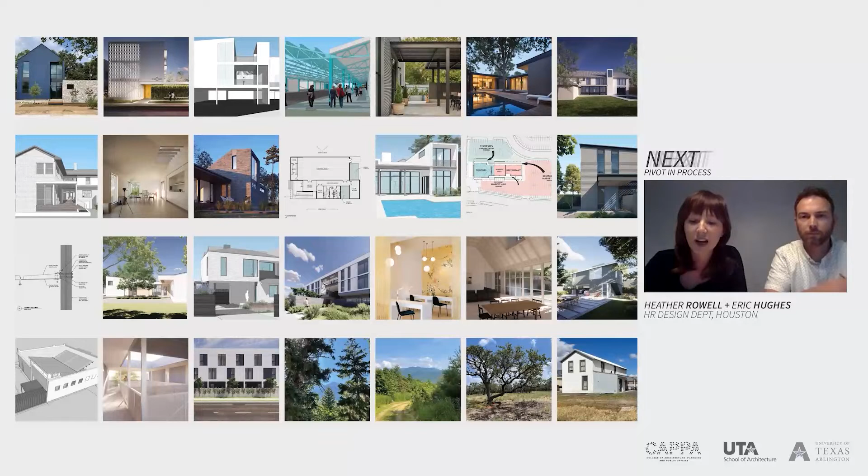This is a little thumbnail of each one in chronological order. They all took really different trajectories, and each one caused us to constantly recalibrate and reassess our design process and the way we communicated with our clients and the people we work with daily. So for this lecture, we decided to pare this down to 5 projects. They're all pretty unique, a couple of them are built, actually 3 of them are built, one's completely, a couple are in process, and one got put on hold indefinitely.

We just wanted to talk about that kind of ebb and flow in the process and how each one is different. So the first project we want to talk about is the Montrose Hotel. The Montrose neighborhood is a really vibrant, energetic neighborhood in the center of Houston, very eclectic, with a lot of culture and energy. We met these clients because Eric and I designed Goodnight Charlie's while we were both at Content Architecture. Goodnight Charlie's is a honky tonk, and we had designed a modern version of a honky tonk for them on the site in Montrose.

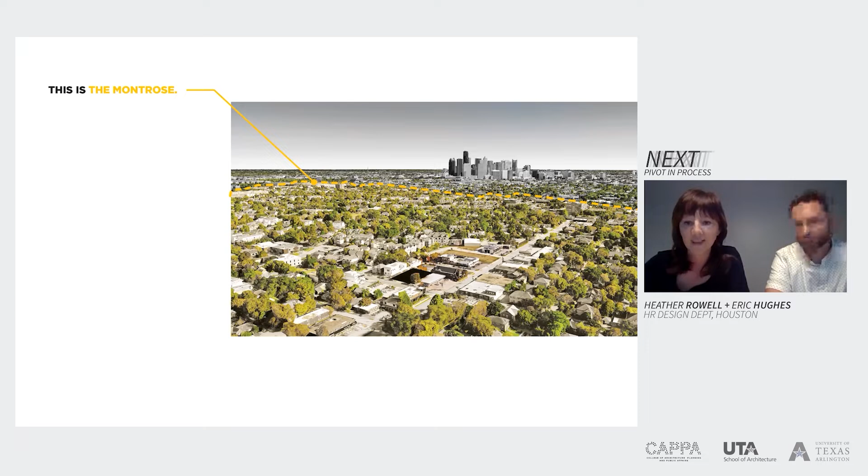This is Montrose, giving you an idea of its proximity to downtown. Goodnight Charlie's is located right here. They approached us and said they would like to build a hotel nearby to Goodnight Charlie's so that they can talk to each other and be an integral part of this area of Montrose.

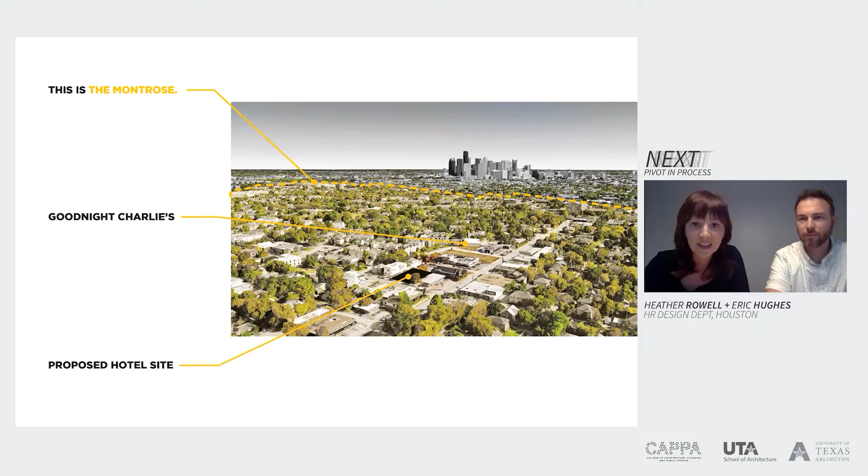But this was on the site. What they initially said is that they wanted to renovate this, a 20-unit apartment complex built in the 70s. It had a pool that had been filled in with dirt, and it was really run down. I took measurements out there and there were cockroaches and bugs everywhere. So it was a pretty daunting thing to think about in terms of how to renovate it to achieve the goals they were imagining.

There were a few things we were really concerned about as we went through the design process with them. One is that we would be changing the use from an apartment complex to a hotel, which meant we'd have to introduce an elevator. We would be required to have additional parking not already on site, so it would probably have to be off-site. It would require additional egress and fire considerations we'd need to take into account. We were also really concerned about the compressed floor assembly of the initial structure; the ceilings were at 8 feet with window units, and reintroducing an HVAC system would have compressed that ceiling even more. As we worked through the design process and came up with ideas, we became more and more concerned we weren't going to achieve the spatial and experiential qualities they were really looking for in a hotel.

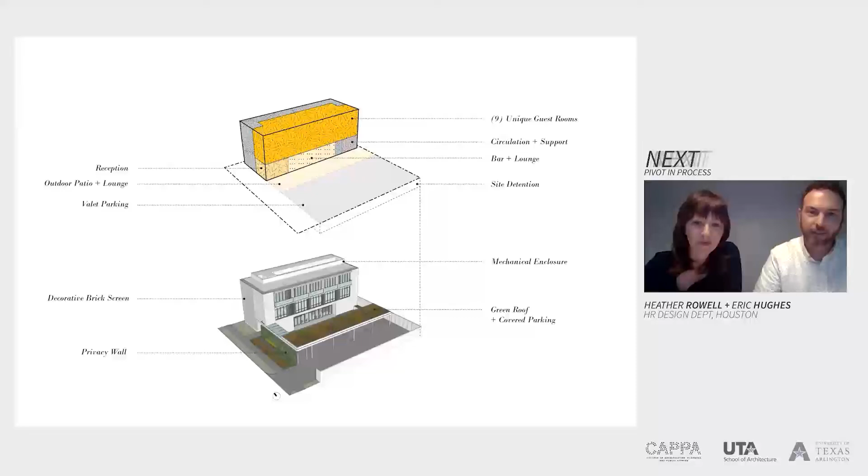The big departure point here was that they decided they wanted to keep all the parking on site. In that case, it meant we had to go with a boutique hotel that has 9 rooms, distributed over the top 2 floors. The ground floor would be a bar, a lounge, and an outdoor patio.

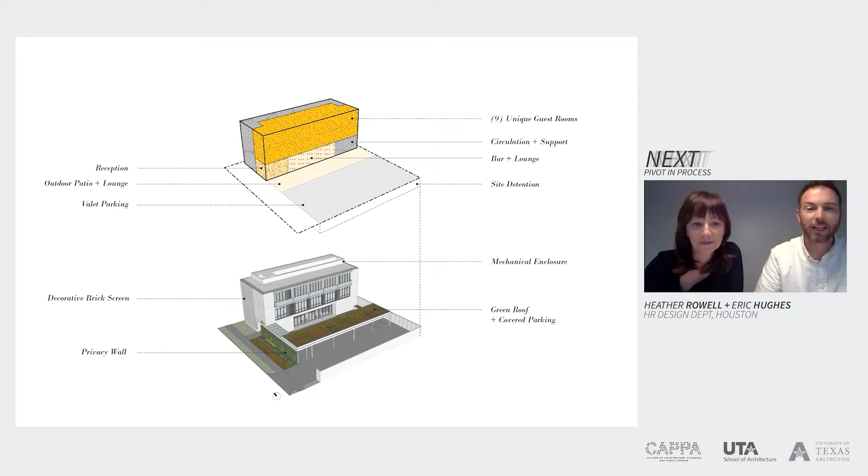On this very small lot, we tried to squeeze in a tiny portion of coveted outdoor space adjacent to the bar and lounge area, while still maintaining some privacy from the street and the parking. So what you see here is the ground floor, the bar and lounge, the lobby near the front, and the direct connection between the bar and lounge and the outdoor patio area, which would have a water feature and is intended to act more like an oasis. You also see the separation between that zone and a masonry wall that divides the parking lot, as well as a wall dividing it from the street.

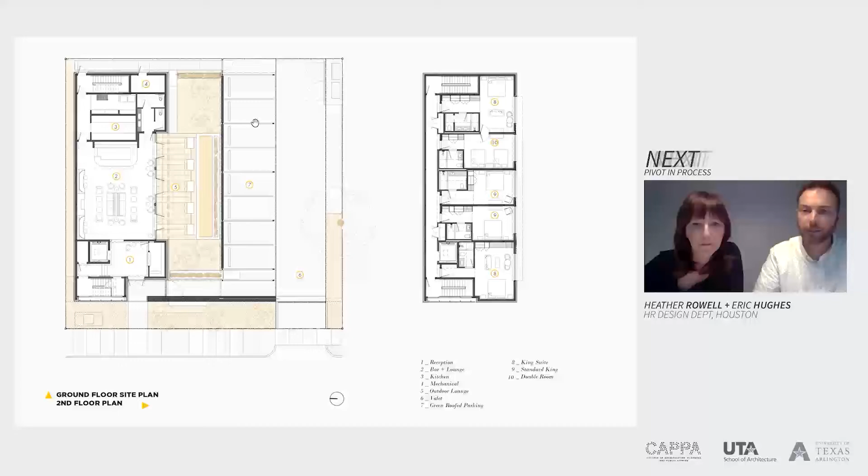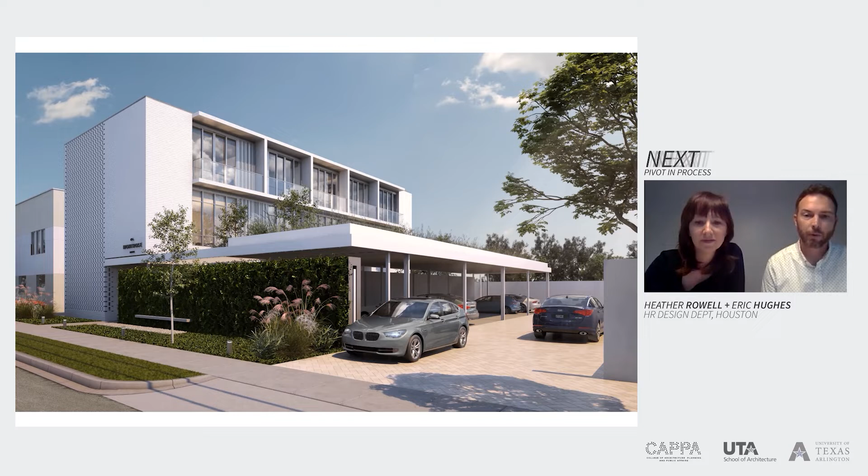This is the rendering of what that would look like on the site. You see the separation of the parking, and in this case we're trying to give a lot of privacy to the units while still maintaining a friendly appearance towards the street. To do that, we tried to implement a lot of texture along that facade, even though it was fairly sparse, through a brick screen that is a focal point at the stairwell, a green wall, and a green roof that covers the parking.

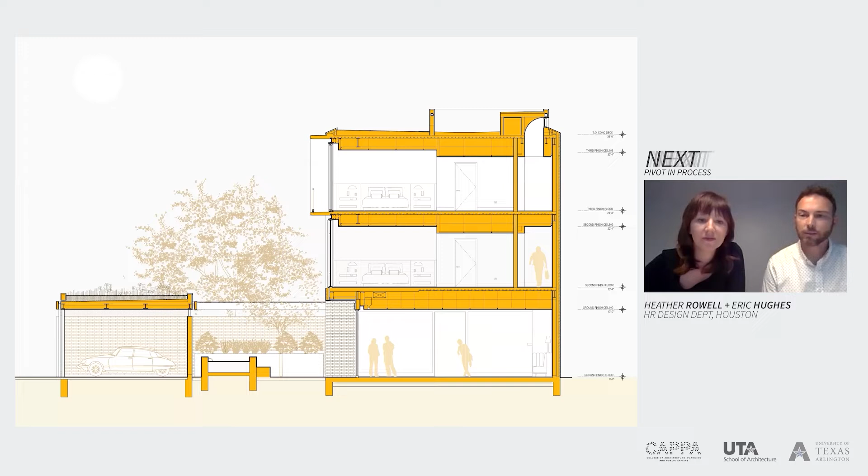This is the sectional condition that you end up seeing, which is really largely about creating these internal views, either into the courtyard or when you're looking over the courtyard, having a green roof to look at above the parking as opposed to just a straightforward parking deck.

This gets back to the idea of the screen and the brick facade, trying to get playful with that from the street. We did a number of studies, experimenting with different ways to develop the masonry. This is the one that was settled on, with the idea that it acts as a lantern and its own signage element at night, brightening up that facade.

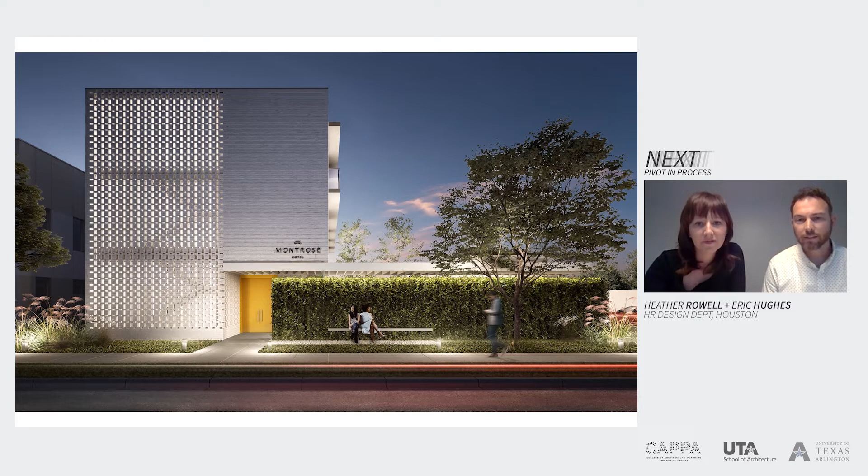Just a quick view of the exterior, again trying to make that an oasis and carve out a little tiny piece of outdoor gathering space on a very tight site.

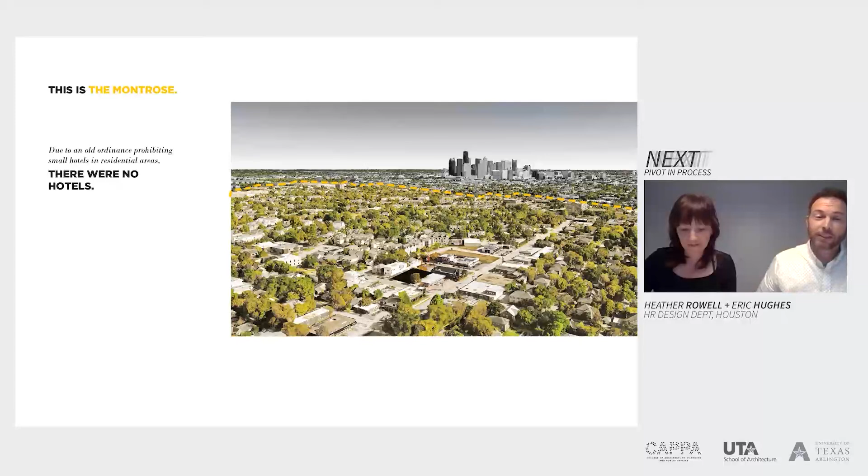But before we could really get anywhere with all of this, there was one big hiccup we had to get past, which is that this is in a residential area where there are no hotels. There's a distinct reason for that: the city of Houston has restrictions on hotels under 75 rooms and requirements for placing those in a residential neighborhood. Even though this wouldn't seem like a residential neighborhood to many, since it's part of a linear corridor of urbanism in a very commercial, walkable district, everything behind that highlighted section is all residential neighborhood. So the city wasn't going to naturally just approve this project.

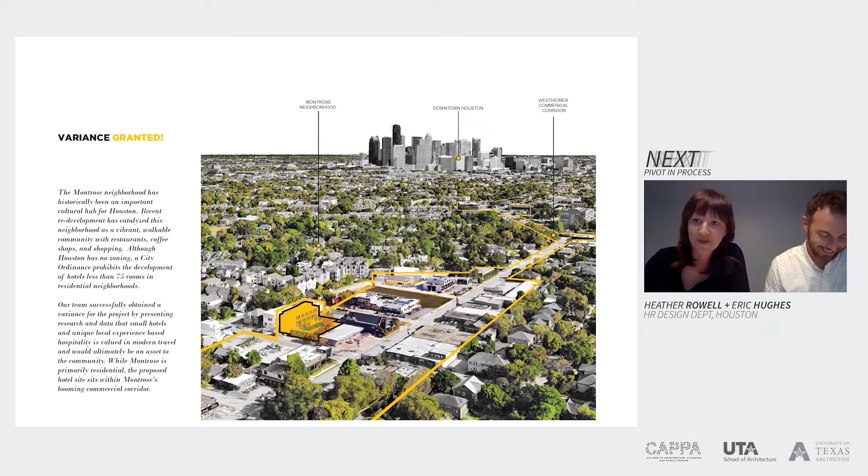What's really interesting is that we pride ourselves in Houston for having no zoning, and we managed, for our first project, to find the one area where there was a zoning restriction that wouldn't allow us to build what we wanted. So we had to go for the variance, but luckily we got it.

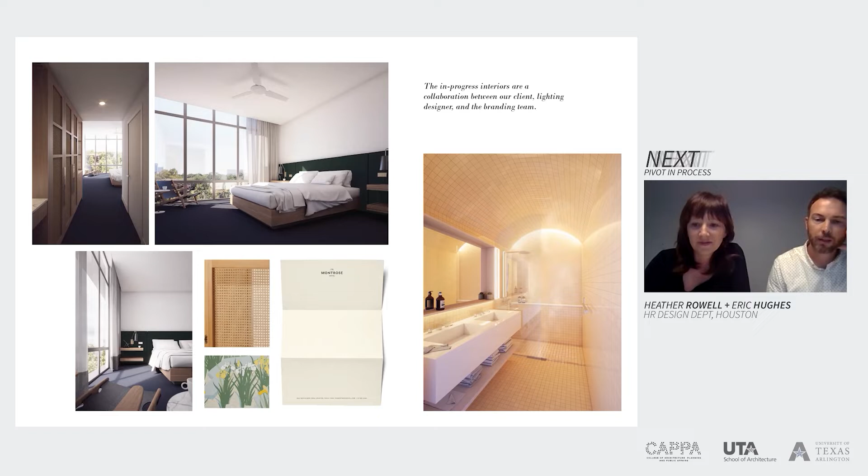The next thing, in developing the rooms, one of the great things is that we got to work with a whole collaborative team. We had interiors we were working with, as well as a branding department and graphic design, and that all went into determining and influencing the look of the interior of these rooms.

Unfortunately, it started out right before the pandemic that the project went on hold, and then the pandemic kind of sealed the fate for an indefinite amount of time. I think there's a chance it might come back.

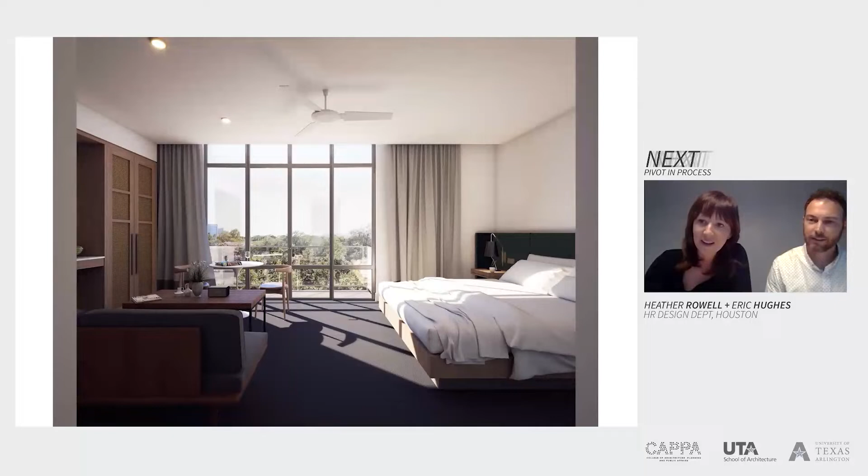If it comes back, it'll probably be in a different iteration. But for now, this one didn't. We got all the way to the point we were about to submit for a permit, and the project got put on hold. So projects have a lot of stories to them, and this is one that we'll see.

And to add to that, it had an established large pecan tree in the middle of the lot. And if you know anything about Austin, they care a lot about the trees, and they're very strict about what you can do on lots that have established trees. So very quickly that became the governing, and in many ways the pivot point, for the structure. And it became the main courtyard that the home wraps around.

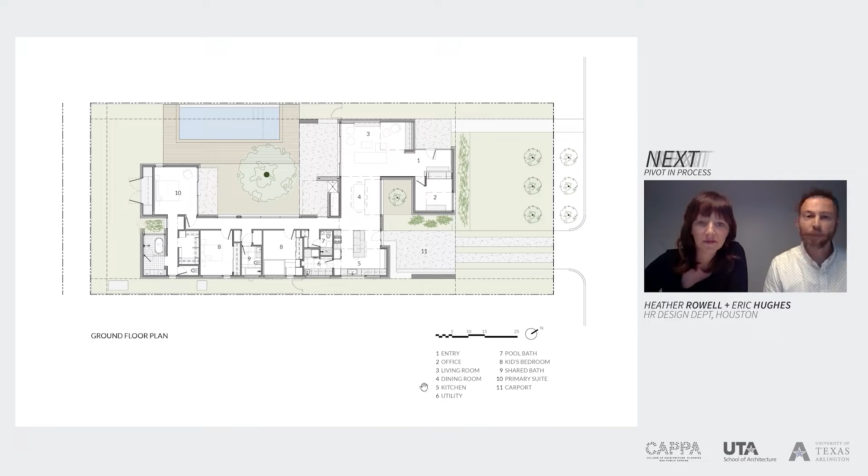But then in addition to that, we created a series of additional courtyards, again trying to get this idea of a house that unfolds as you move through it. So that it's not just about one moment in relation to a courtyard, but it's a series of moments that unfold as you move through.

This is looking through the carport to that first kind of tiny courtyard that's off of the dining room that we'll see in a bit. Entry sequence - you're coming in a more formal entry, you'll see the masonry wrapping through, and then on the right, the idea of these clerestory window conditions that go against it.

The owner was very much drawn to this idea of a mid-century modern language, but we tried to push the usual horizontal datum that you see in those kind of projects.

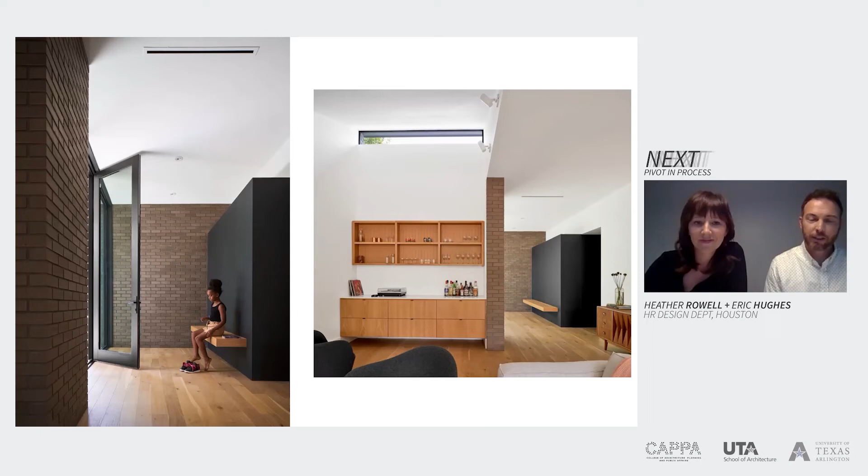And even though it has that from the street and even from the courtyard, there are these moments where there's a lot of verticality and play within the ceiling plane. And that happens here in the study, that happens in the living room where you see it vaulting up to a clerestory condition, that happens again in the dining room.

And what that begins to do is create a series of spaces that are informed by these ceiling conditions. And as you move through the space, even though it feels very horizontal, the sectional condition is very diverse.

Looking down the hallway and again to the main courtyard on the right. And one of the things that we get to be a part of in a lot of these residential projects is helping define the narrative of the home for the clients and getting to design custom components to help define that narrative. In this case, that was a series of bunk beds that relate to the way in which it's going to be used by the kids who will be in that room.

This is the primary bedroom looking back towards the courtyard. And then here, the primary bathroom, and the way in which light is modulated in different ways as you move through the house.

This is really just the most extreme version of that, where all the other little insets and courtyards are bright and airy, and this one is much more subdued and more serene, in relationship to a fairly pivotal skylight moment and a redbud tree that sits below it.

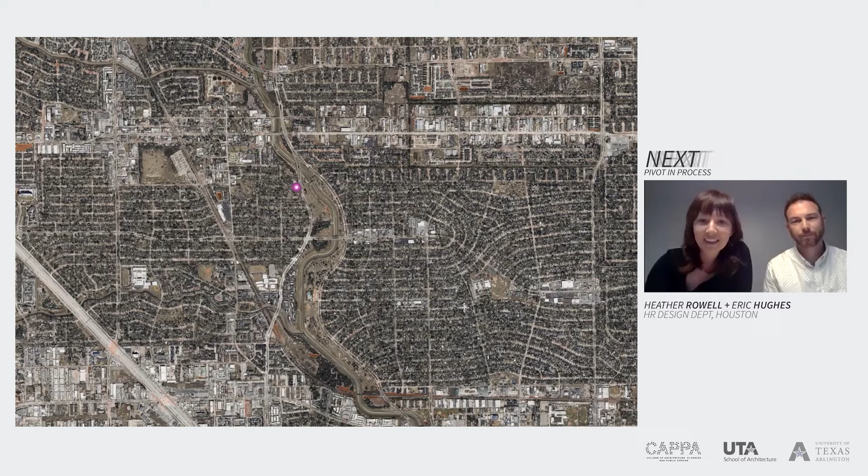It's a house she had lived in a while, and she wanted to add an addition and open up some spaces. We looked at the neighborhood, which is a really cool area on the north side of Houston. This isn't a highway, that's White Oak Bayou running nearby, and there's a big open park space right beside the lot.

Where there's bayous in Houston, there's flooding. This map shows in dark blue the floodway, light blue the 100-year floodplain, and green the 500-year floodplain. Being in the floodplain creates a whole new set of restrictions and guidelines we have to abide by when designing a project.

Renovating in a floodplain becomes really restrictive. If you touch more than 50% of the value of the structure, you have to raise the entire structure above the base flood elevation. If you want to do an addition, you can only attach it through a doorway—you could never open up an entire room onto another room of the addition—and it would need to be at the appropriate elevation per FEMA and local restrictions.

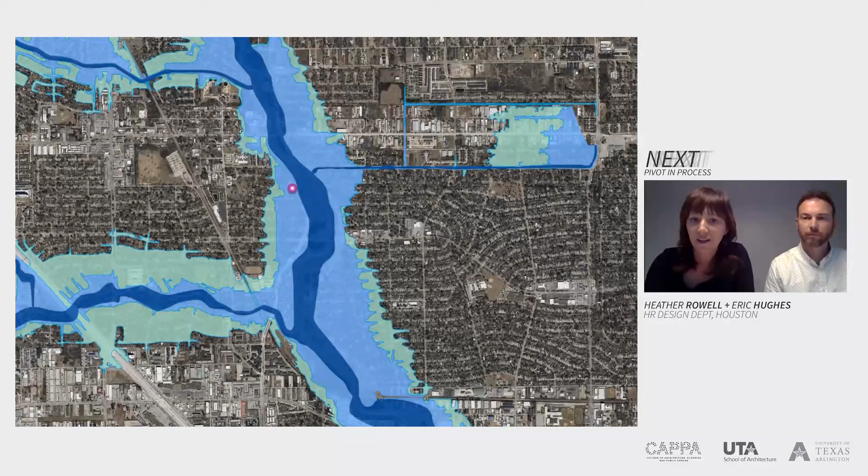We realized she was in no way going to get the house she wanted if we tried to renovate. So it meant we were going to demolish the house and start new, because she liked the location of the project site. She gave us a few parameters that were really important to her.

Even though there was a major street running as a spine to the east of the project, she wanted it to be private. She also wanted us to employ sustainable strategies, requesting a water cistern and solar as part of the house. Probably her biggest request was that whatever we build maximize her lot, so she could use the landscape more than she had with her previous house.

So we worked out a way to anchor the house to the edge of the site. One nice thing about the site was this grove of trees to the north—there's a mason lodge on the lot to the north, so the likelihood of those trees going anywhere for a while was really low. We oriented the house in that direction, which also meant we opened up the lot at its widest point.

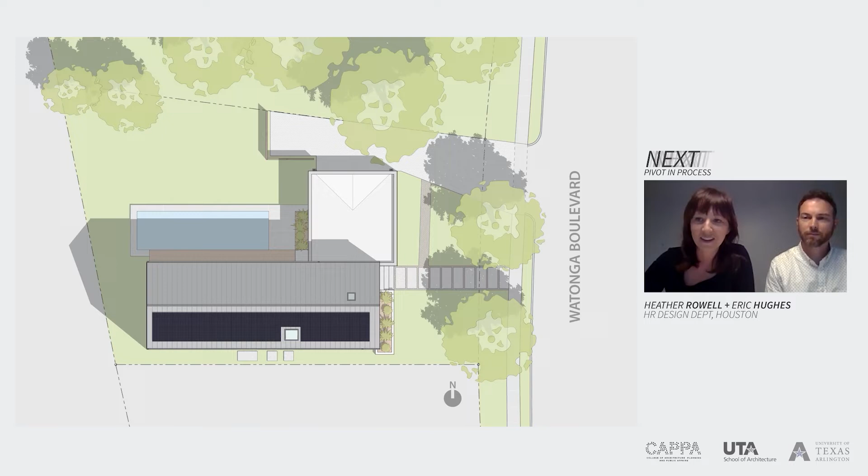She also fosters animals, so a big part of the design challenge was making sure all the surfaces were good for animals to use and share with her, and durable. This is the floor plan of how it started to shake out.

We created two boxes—one is the garage and utility core, and one is the main volume of the house—and connected them with a transparent stitching connector. Even though we were mostly closing the house down to the street, we wanted it to still feel inviting to someone approaching. That stitch creates a spine running through the project, which is all covered outdoor space, connecting the two volumes.

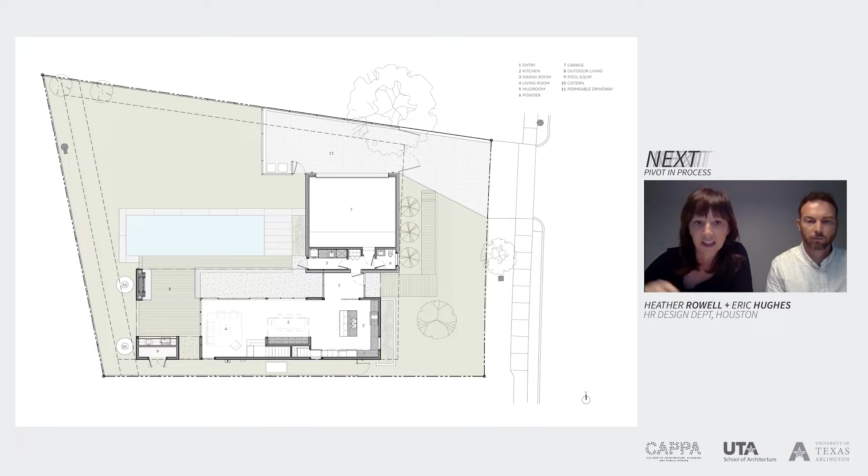On the ground floor, in the center, there's one puncture that goes all the way to the roof, bringing light in from the south side down to the core of the project since all the windows face north. This is an early sectional model, showing the skylight to the south dropping toward the center and punctuating those public spaces.

Another thing we considered is, whenever we have to raise a house high out of that flat pancake landscape, how do we transition back to the landscape in a nice way rather than coming out of the ground abruptly.

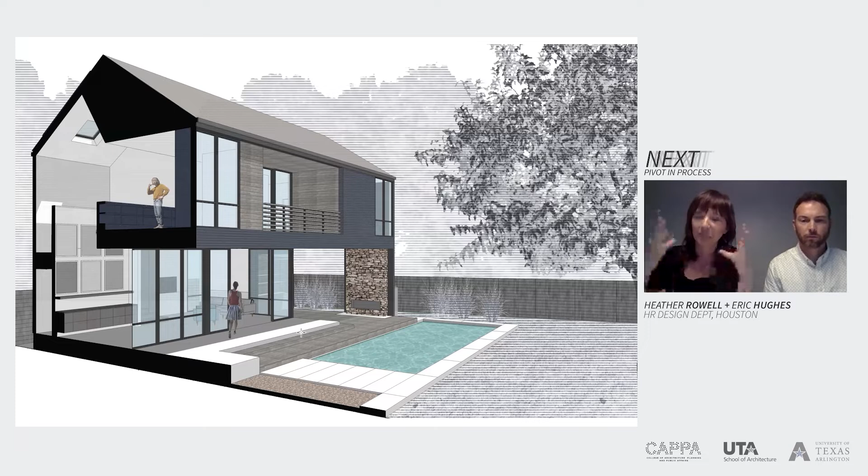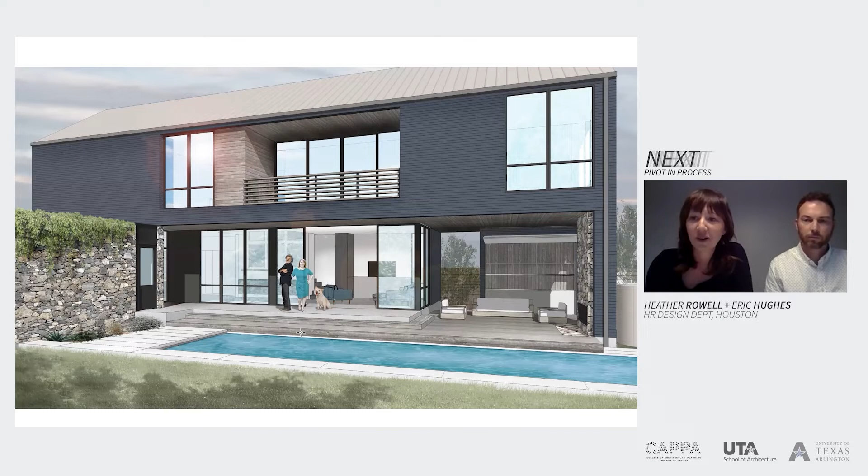One challenge we ran into: when our client applied for the loan, the house appraised lower than comps in the area, and the bank asked us to increase the square footage. We were already in permitting and thought the project was moving forward and golden—then the client came back and said, can we enclose this balcony?

That's literally all the square footage that we needed to get added back to the house for the bank to approve the loan. So we did that, and we turned it into an exercise room on the second floor. Originally, we had planned for there to be an exercise space more centralized, but now it's become a closed area. In the end, it was a situation that we weren't happy about when the request was made, but I think it worked out for the best.

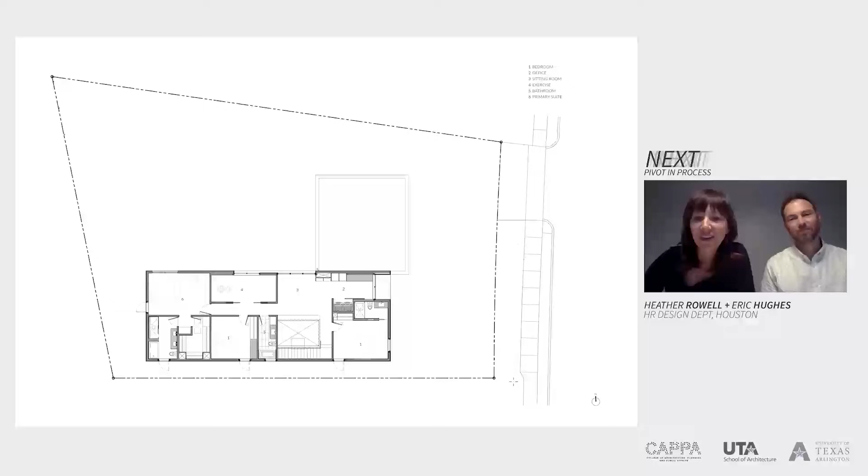So this is how the form took shape once we enclosed that balcony area we had planned for. You can see it's a really simple form: one simple gable that runs the length of a 2-story volume containing all the main spaces, and then a utility core clad in full stone veneer. A very simple material palette is being described.

It's common for us to have projects that don't have huge budgets. So on this project we used a Hardie trim material as a rain screen. It was a little thicker than usual with a thinner profile, and we didn't lap it, which created a look that was unusual for a really affordable material.

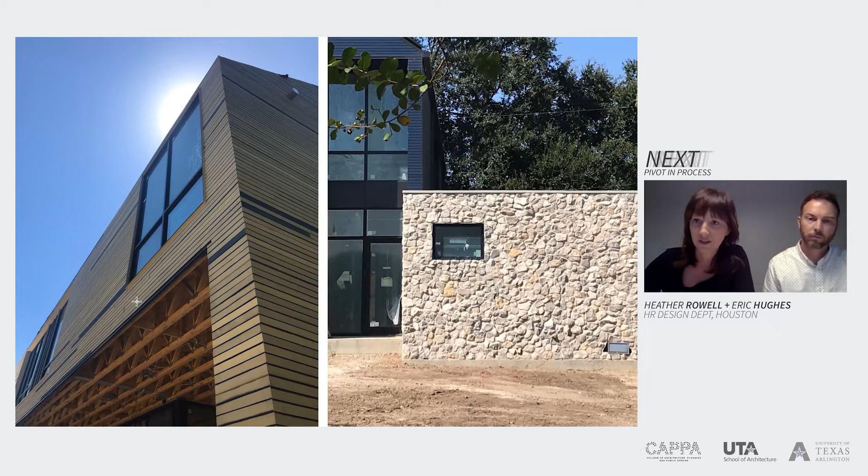This is the front of the house where you start to see that it has that transparent spine running through the middle. You can see straight through the house, but you can't see into the main living spaces. The space above the entry is her office.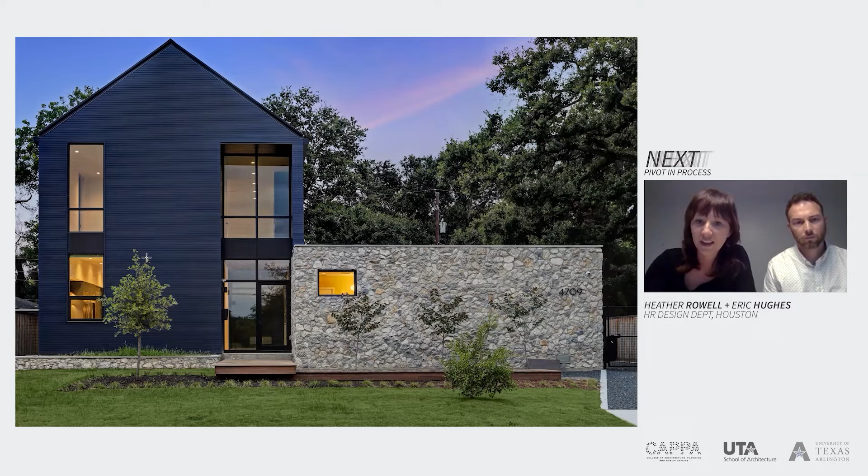And that's that spine again, looking from each direction. This one just finished construction, so we don't have all the photos yet. But here you can see the light well functioning from above, and how the view on that ground floor plane turns to a horizontal capture of the landscape, then that gradual transition back down from the raised plinth.

This is the main ground floor space where the kitchen, dining room, and living are all fully open. Upstairs, this is her office space that has a view framing the park across the street. It also has plenty of built-in shelves for her record collection and a niche for a record player to go.

It was a fun part of the project where we got to design something specific to the client's needs. I think that's a common thread through a lot of our projects - we try to do a few areas that have something custom within them, and we're really careful on how we detail it, but it only happens in a small area that could have a big impact.

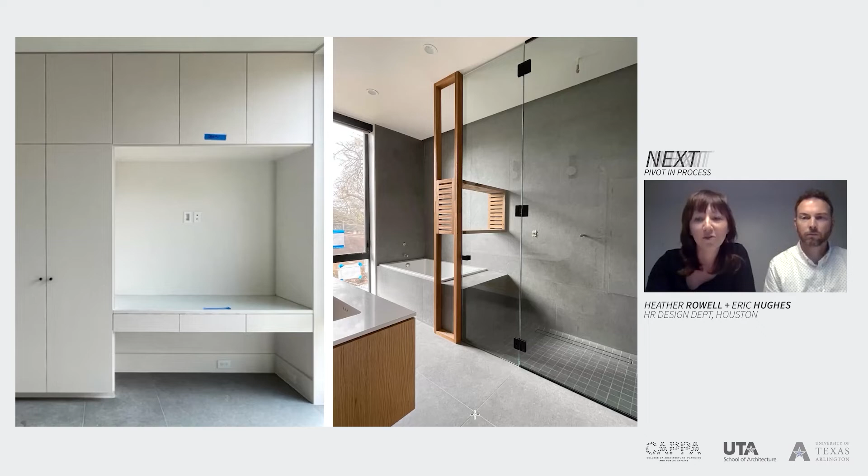So the master bathroom is pretty simple, but we created this teak shelf system that divides the bath from the shower area, creating an element that feels really custom for the level of house this is.

Additionally, we designed a custom stair handrail. We found that that's a pretty easy way to make a big impact within a project. And then we worked a lot with texture, bringing in a lot of different materials into the project - you see that on the right.

And then this is a view looking towards the trees to the north. This is the adjacent lot and the trees that we hope never get cut down.

So this is a project that is a bit of a departure in terms of language from a lot of what you'll see of our work, but it's very much informed by the fact that this is a historic home. It's a home that was built in 1910. A former governor lived there, Ross Sterling. You see it here on the Sanborn maps, the original location.

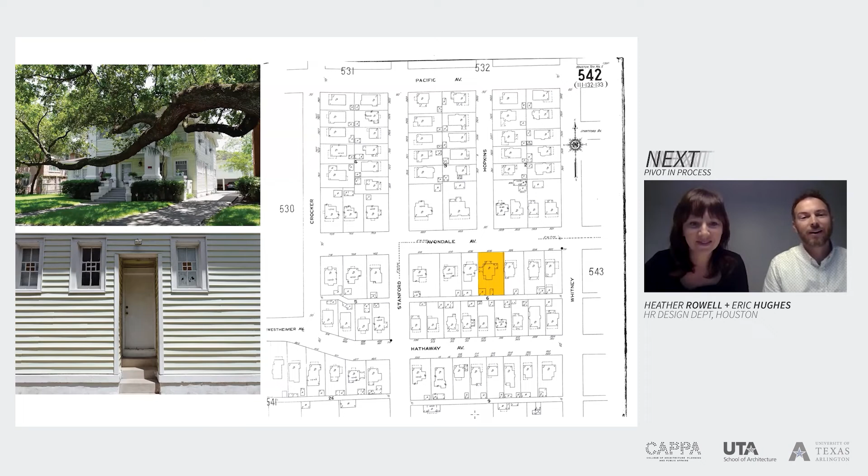The home was subdivided over the years. There were a number of different units - effectively a number of apartments that this had been turned into.

Then the developer, in their quest to make improvements to the small complex, decided they were going to cover the whole thing in vinyl siding and rip out all the original windows to put in vinyl windows. At which point the city said, I don't think so. They red-tagged it with so many red tags that the developer became overwhelmed about how they would get past that. That was in 2016.

So it was abandoned for a few years. The owners of this project used to live in the neighborhood and walk their dog by it, and they would walk by and just say, man, that would be kind of our dream home - we'd love to have that someday.

And because of a series of poor decisions by the developer, that actually became an attainable thing as it sat on the market because no one wanted to deal with it.

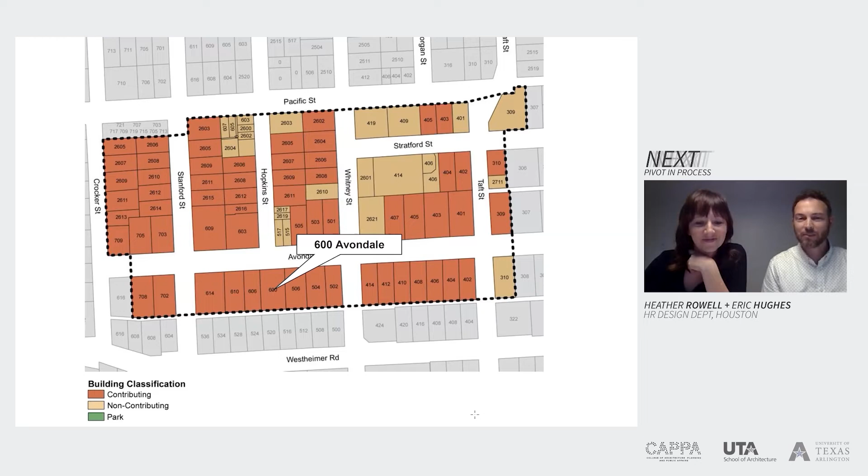This is the historic Avondale district, and you'll see we sit just on the edge of that. Because of that, this is considered a contributing structure, which means we really can't do much to the exterior other than restore it. In this case, we negotiated with the city to restore it to what it should have been, even though a lot of damage had been done that we couldn't do anything about.

So the first step was uncovering a lot, taking off the vinyl siding to see the state of the original 3/4 inch wood siding, which we were able to save and keep.

Also looking at the porch and the fact that it had these large wings on it that weren't part of the original structure and were contributing to the deterioration and demise of the porch. That all got torn off. The whole porch literally had to be rebuilt.

Thankfully, we had owners that were willing to really reduce the square footage of their home, and in this case, they were willing to modernize the back of the home a little bit.

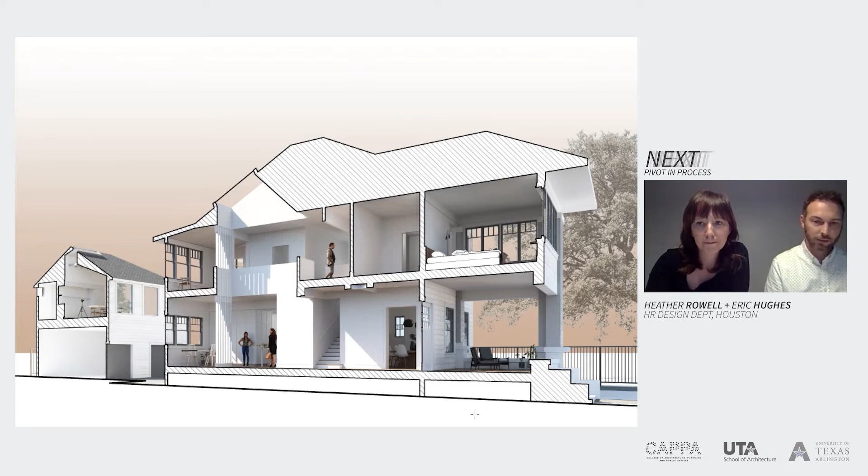In the way these older homes would do, we left the formal spaces at the front of the home, but created this big moment when transitioning between the two. We also relocated the door so that instead of a large formal entry sequence, we gave that space over to the dining room, creating a connection between the dining room and the kitchen in the rear.

And then we also reworked the staircase, which had picked up a large amount of real estate, and straightened it out.

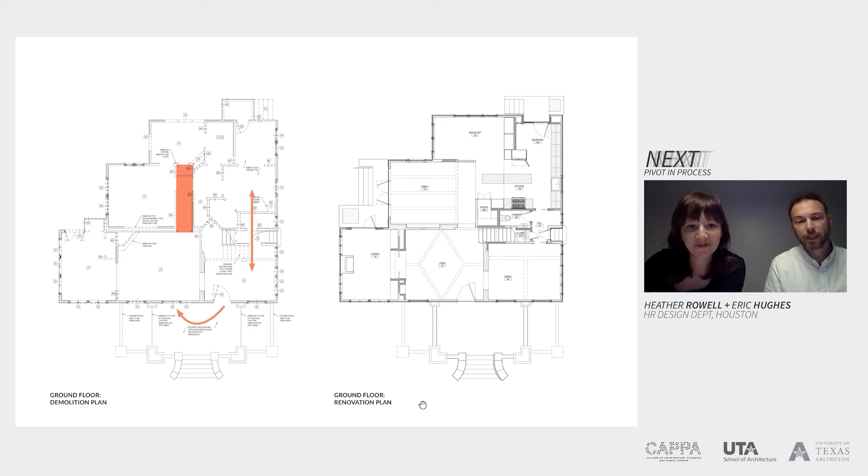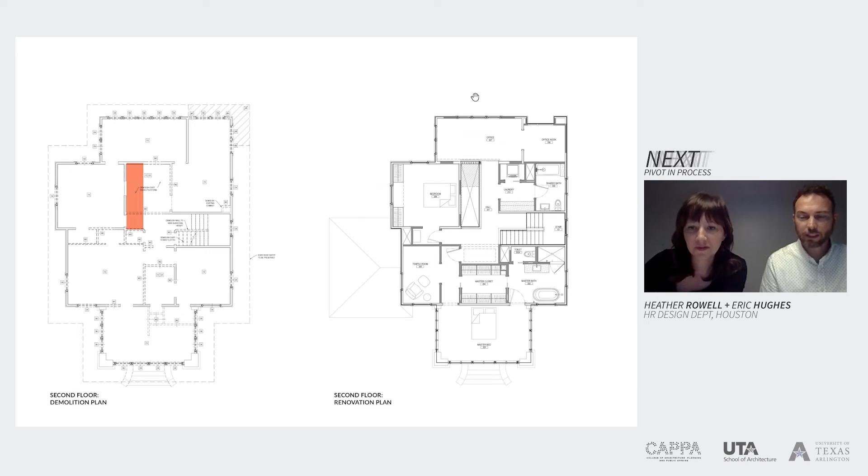The other thing to note is that in these old homes, there were sleeping porches off the front and the back. Moving forward, you'll see the way in which we incorporated those into bedrooms.

This is looking at the main entry. We repurposed the front door, actually rebuilt the front door to match the original, per the historic requirements.

And then when you come in, you're directly on axis with that light well, which you're about to see from the second floor vantage point, the way in which that got carved through.

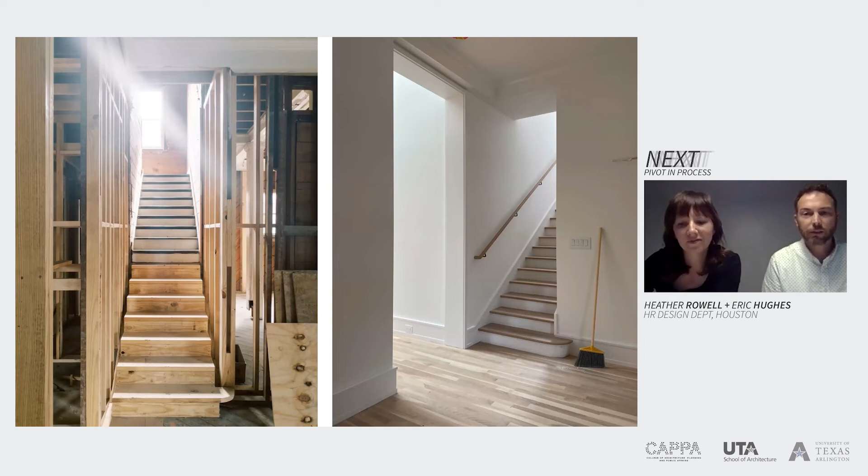We kept a very simple white interior palette, but the owner was really on board with the idea of introducing texture within that white palette. So the vaulted condition becomes a scallop motif, which then carries through to a screen on the first floor, with the straightened out staircase.

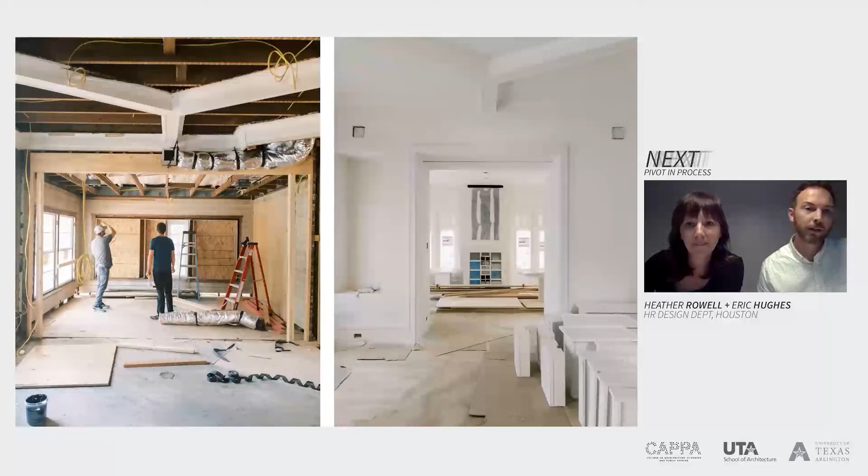We made efforts to maintain the existing trim, there's something nice about the character of that, even the kind of old paint that exists on it.

This is the primary bedroom, which is the old sleeping porch, which you'll see has become the kind of treehouse moment of the home, and has a large oak tree with branches that sprawl and overlook it. This is from the second floor, seeing that kind of scallop texture that we created, introducing some more modern details in relation to a more traditional home.

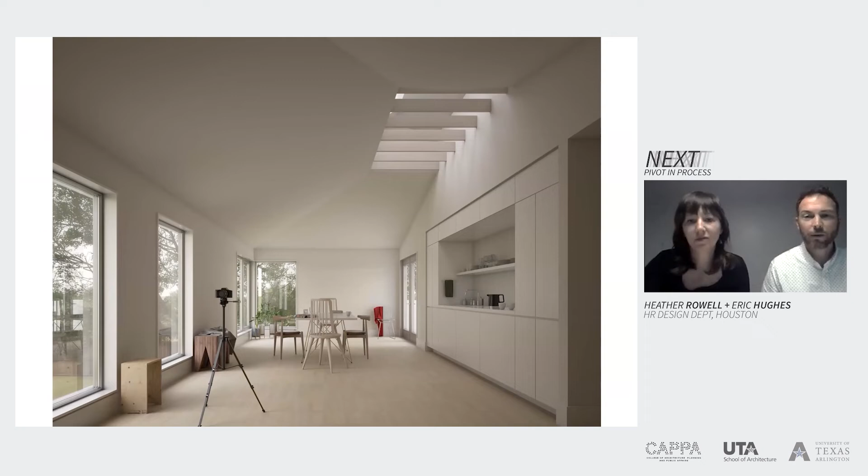Again, with the stairwell. And then in the rear, the garage apartment, which became her photography studio and his kind of machine shop below. It was on a tight budget, and so of course it was all about light as a photography studio. We just made one big move, bulking everything up to a clerestory condition.

Well, this one is almost done. They should be moving in just a few weeks. So stay tuned, we'll be able to share some more photos of that, especially since the client is a photographer.

This project began in the pandemic, and this is the last project that we'll talk about. It's one that caused a big shift in our office and how we were going to communicate with our clients, and how we would navigate the crazy past year and a half that we've all had.

When they no longer could, we asked them to develop digital models that looked like physical models. So all of these, the students did digital models. We even asked them to add things like X-Acto blades and things in there that bring scale, that make it feel like it was actually a physical model. It was a really fun exercise.

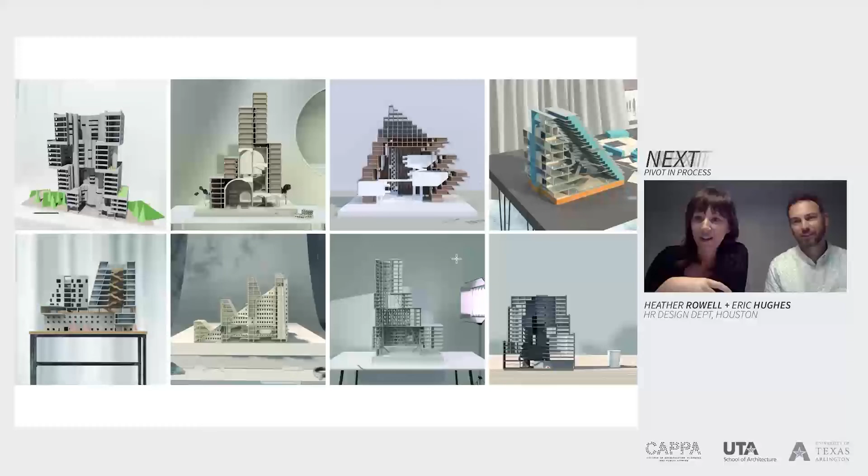Since we were exploring that within the school, we decided to take a similar approach whenever we were going to present the first ideas to the client on this project. We thought we were being so smart. We said this is going to be a great idea: we're going to present three concepts to them, but because it's all going to look like it's made out of basswood, they'll only focus on how it relates to the site, and they'll focus on the form of the project, and we can have a conversation about these basic initial parameters to a project.

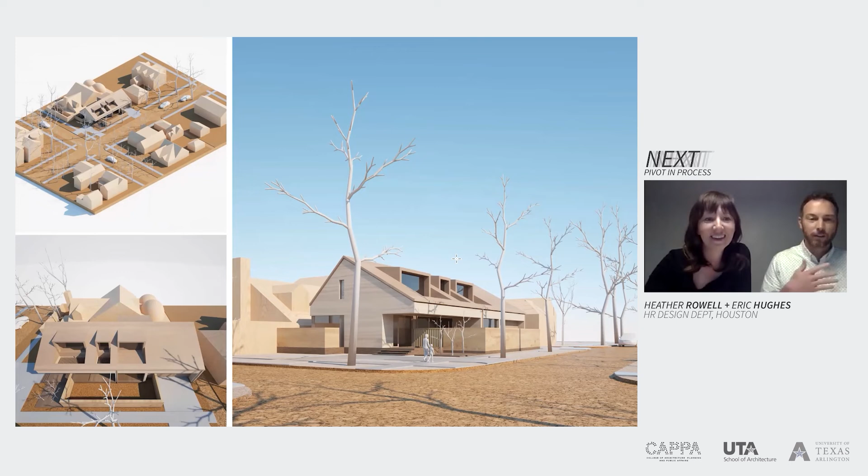Because we constantly have this problem in residential, which is just getting people in that first pass to look past materiality. Sometimes people can get so hung up on one thing, but no, look at the form and look at the space, what the relationship is. So this is the second one we presented, and then this was the third one, which ultimately they ended up choosing. But at the end of our presentation to them, there was a long, silent pause.

And then the first words that we heard were, 'they just all look so brutal.' So we kind of dropped our shoulders a little bit and regrouped and thought, okay, well, that didn't work. But it was a good try.

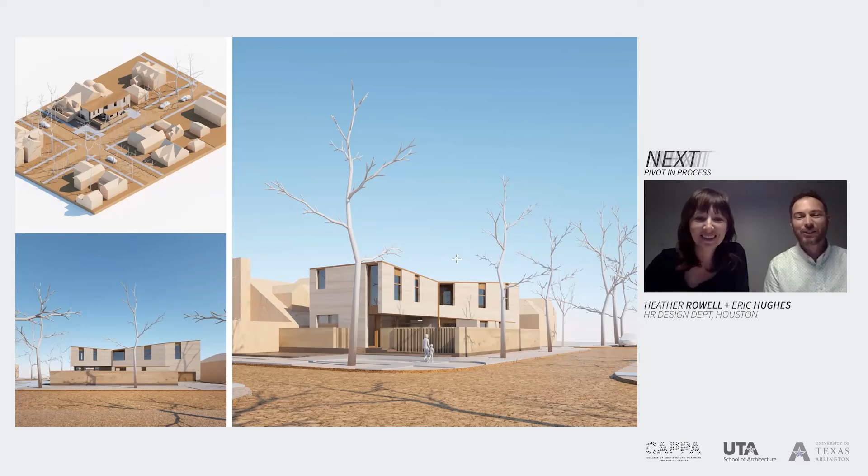So then we went back to more conventional representational means of showing what the actual materiality was. And it was funny how the minute that we did that, it suddenly became very accessible again. Suddenly they were on board with the same ideas, even though they were just being represented in a different way.

So the project kind of took shape as a masonry structure, but then the roof shape was dictated by solar considerations as well as rainwater collection, and then it had an orientation to a side yard on a fairly small urban lot, relatively speaking.

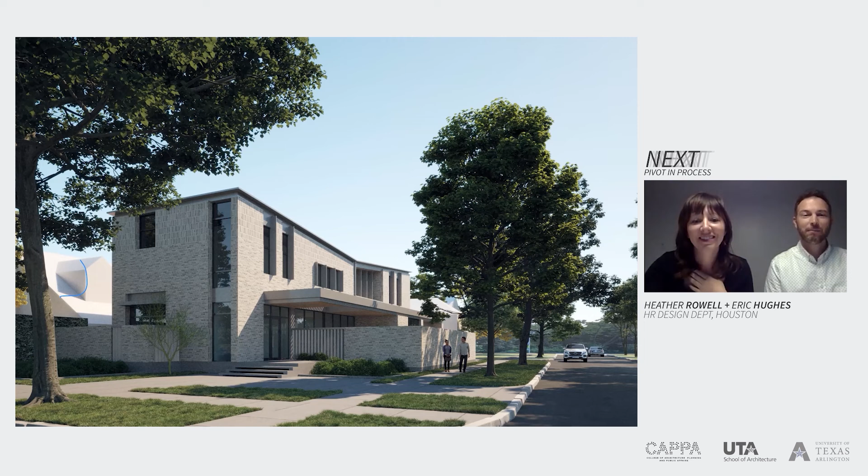And then COVID hit and supply chains changed and material shortages happened, and the budget ended up taking a turn, and we had to rethink the masonry but still introduce ideal texture. We did that through Hardie siding and through using the 3/4 inch thick material, having it be lapped on the bottom and then flush on the top, still maintaining those horizontal datum lines. That made a huge difference in the budget.

Everything from steel to... we're proud to say this one's getting built. This was taken today. So, yeah, stay tuned for more information.

So, yeah, this one's on its way, even though it had major hiccups.

Now that we've kind of shared with you those five projects, what we wanted to talk about at the end is how we talk about the design process. In school, we always talk about it being this linear process. This is the initial way we talk about design process, but I think we all know that it's much messier than that.

A way that sometimes people describe it is more like a spiral, where you have a goal that you're heading towards, but you start out with a lot of options and you're trying to focus the scope and densify the amount of information that you're using to project that idea. So you're working your way around the design process and trying to get to the center.

It is very likely that we will have a goal, a target in mind, and we'll start our schematic design process, but all of a sudden that goal will shift. That point we're shooting for is going to change, and it could change for so many different reasons. It could be that the client has changed their mind about something, or that we're faced with a global pandemic that we hadn't planned for. When that happens, the design process looks much messier and much different from these idyllic ideas we have about process. It happens because we're constantly asked to pivot based on new parameters we receive throughout the design process.

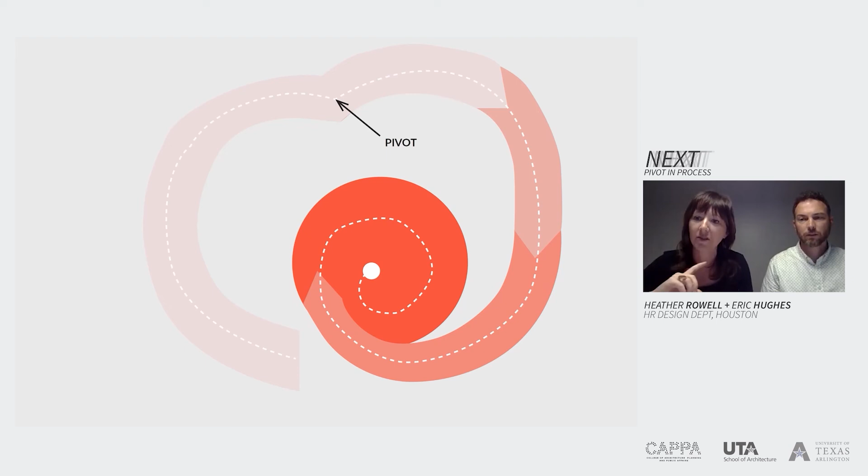Those pivots can occur for so many different reasons. A really common one we're dealing with in Houston a lot is climate change and the fact that we are dealing with flooding. It's changing the way we think about our infrastructure, how we design our buildings, how to make them more resilient. The pandemic completely changed the way we think about our daily patterns of living, how we work, how we want to live in our houses. So those are causing pivots in projects happening right now across the world.

There are also times you have to pivot in a project because there was a supply chain shift, or maybe a market shift. Maybe the value of the land has gone up and the client decides to sell the land rather than build on it. That's definitely happened before too, and it causes a pivot within the process.

Regulatory issues are also things that cause us to have to pivot. It could be something like the city of Houston recently changing the base flood elevation for floodplains. It used to be 1 foot above the 100-year, and now it's 2 feet above the 500-year floodplain. Or it could be an HOA, and a single person in a neighborhood deciding you have to change your exterior material.

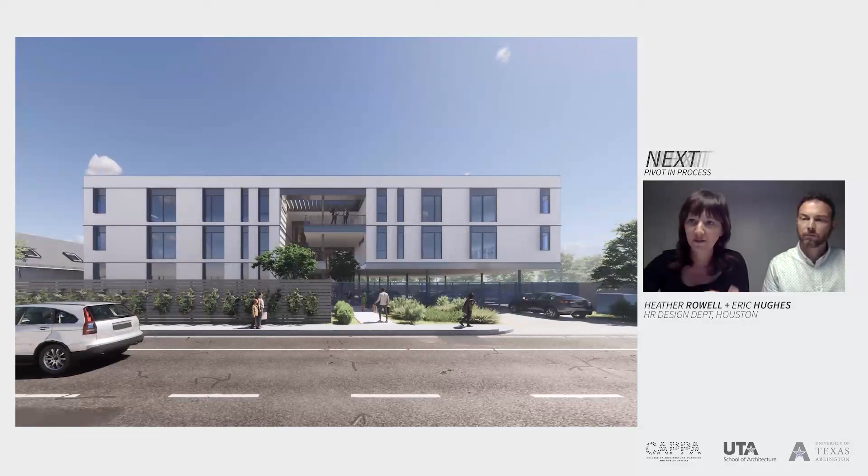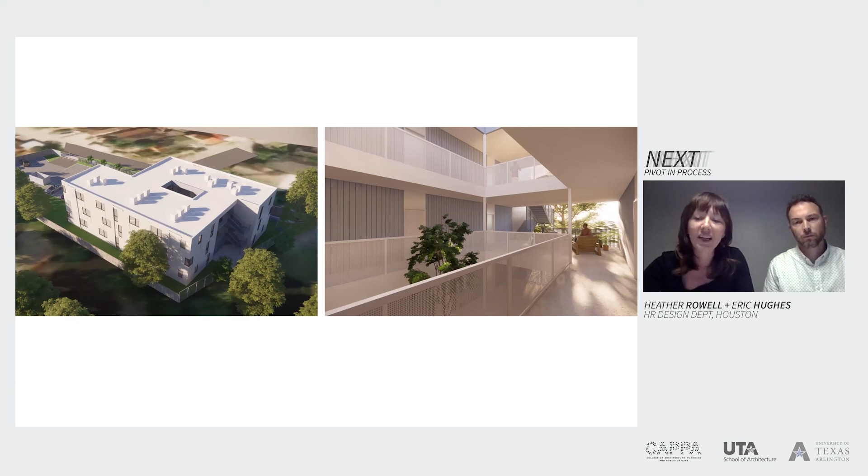These 3 projects are all multifamily projects for the same developer, who tasked us with creating affordable multifamily projects about 20 units each. We've designed them to save on design and construction costs and be more efficient, using the same interior units across the projects. But we're rearranging them based on the site they're placed on, and coming up with new exterior strategies, all using the same material palette so each one takes on its own persona.

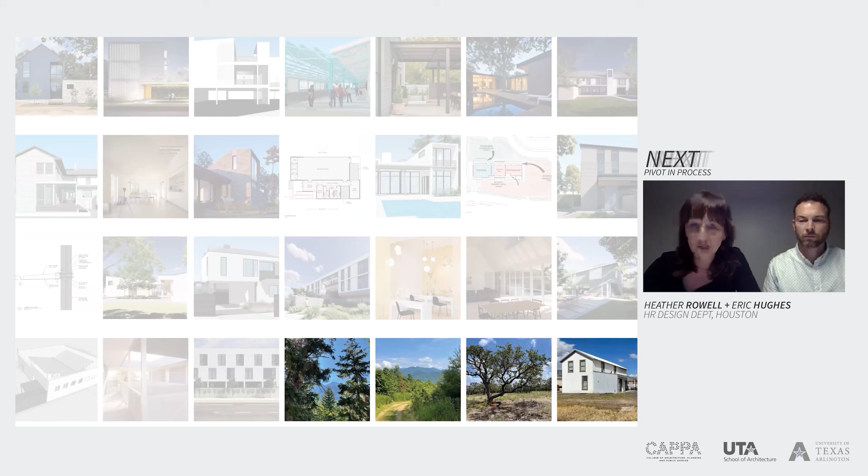That's why we named the title of our lecture 'Pivot in Process.' I think one of the things we've learned is that being flexible, open-minded, and adaptable to these forces that come into our design process helps make the project better in a lot of ways. We don't really consider them a negative challenge—it's a positive challenge. That's it. Thank you so much for having us.